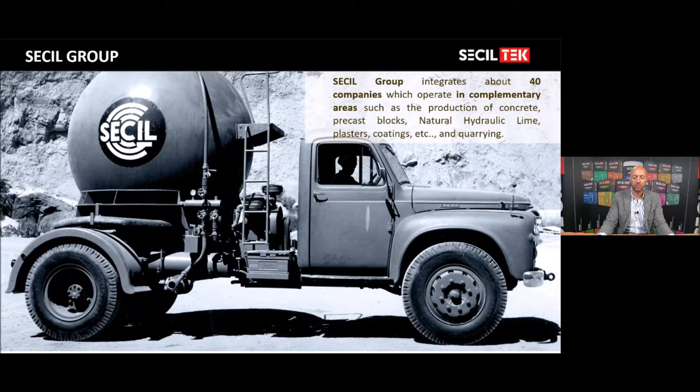Just a quick presentation about SECIL and SECIL Group. SECIL is a leading group in Portugal, founded in 1930, which integrates about 40 companies that operate in complementary areas such as concrete, precast blocks, natural hydraulic lime, plasters, coatings, quarrying, and of course the production of cement.

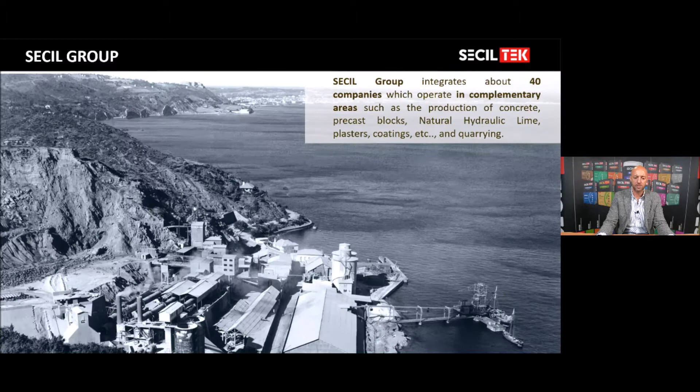The company originated in Portugal and now extends to other countries, mainly Tunisia, Lebanon, Brazil, and Angola, with activities in the cement business.

Regarding SECIL TEK, which is a company within SECIL Group, SECIL TEK is almost 130 years old with large experience in lime production. It was founded in 1891, called at the time Cimentos Naturais e Cal Cimento, and is one of the oldest hydraulic lime production units still operating in Europe.

Aside from lime production, we now also produce natural hydraulic lime, which we use for mortar production and also sell in the market as a premium binder for mortar production.

Starting now on the subject of natural insulations, I would start with a concept called Ecocork. This concept is based on several concerns, mainly the use of a premium binder, which is the natural hydraulic lime we produce, and also, as the name says Ecocork, the use of durable, recyclable materials, preferably from natural renewable sources - here we talk about cork.

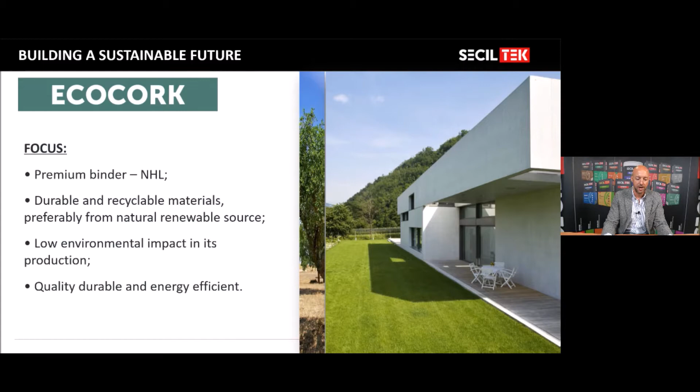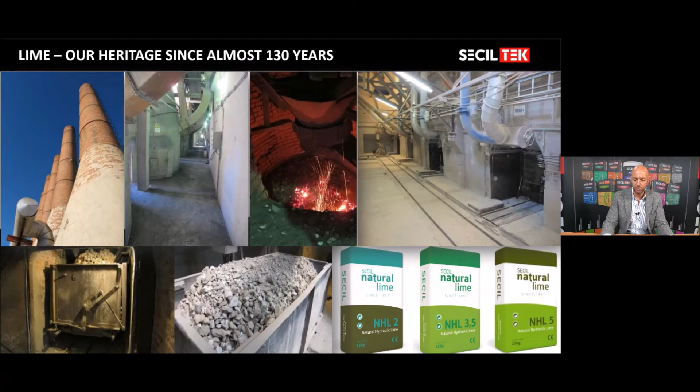The NHL and the cork together represent materials with low environmental impact in production, and also quality, durability, and energy efficiency. Considering the binder, the NHL, we have our production unit, our plant in the center of Portugal, where we produce NHL2, NHL 3.5, and NHL5 that work as binders for our mortar production, but also for supplying construction sites for mortar production in several countries.

These are the main advantages of using NHL compared with other binders. Its pureness - according to the standard and our production, it doesn't allow any additions, so it's 100% natural with a high free lime content. It's characterized by CO2 absorption through carbonation, and also low emissions, so it's almost like a full cycle in terms of emission and capture of CO2 when it sets.

Also, the gradual development of mechanical resistance is very important in mortars because we want them to gain resistance at longer term with slower increase, to prevent pathologies like cracks and micro cracks in the mortars themselves.

The natural hydraulic lime is also characterized by its hydraulic and aerial set, so it's a binder that gains resistance through these two types of setting, and it's a binder in mortars with total chemical and physical compatibility with ancient mortars.

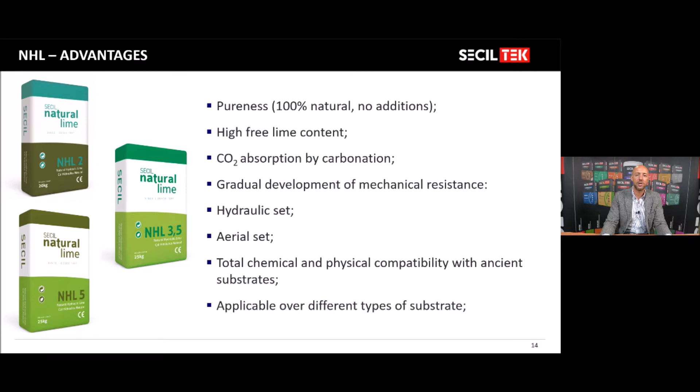It can also be applied over several types of substrates with excellent water vapor permeability performance, without calcium sulphates, and with very good resistance to salts.

Here we talk about durability of the mortars. So when we talk about mortars with NHL, we are talking about resistance to salt in environments with rising damp, capillarity, hygroscopic salts, but also freeze-thaw cycles, which is very important in northern countries. It's also characterized by its natural color, with excellent workability when used in mortars, and it's recyclable.

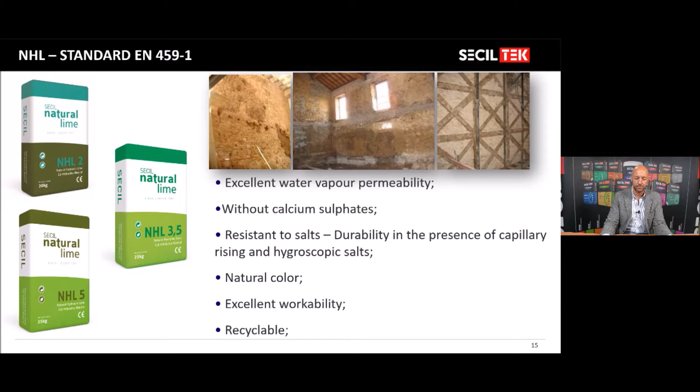Now we get to the aggregates, and here the concept is even more interesting because we take the cork literally from the trees without damaging or killing them, so we are even improving their durability, and we take it from the skin of the trees to use it on the skin of the buildings.

So this is a concept of sustainable construction where we look for the minor environmental impact possible and the lower power consumption possible. So as I said, we are using natural durable raw material with the aim to reduce energy consumption through the improvement of thermal insulation of the buildings.

This way we are improving the quality of the internal environment, including acoustic and health benefits. So here we focus mainly on the comfort of the people living or working inside the buildings, and the health benefits in terms of internal air quality.

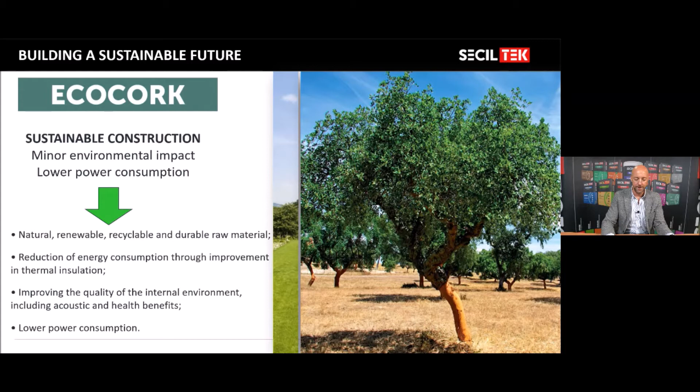When we talk about industrial mortars, and Ecocork is an industrial mortar, we cannot forget that using these aggregates, which is a 100% natural lightweight aggregate, we are focusing on the thermal performance of the buildings, the acoustic performance - mainly aerial sounds and reverberation - and also the durability. Three key factors that play a big role when developing a new building or looking at refurbishment or rehabilitation.

This represents costs and a long-term view in terms of what we have to do in maintaining the building. So when we look at mortars and products that have high durability, high resistance to freeze-thaw cycles, temperature amplitudes, and presence of salts, we are looking at high durability and low necessity for rehabilitation or maintenance.

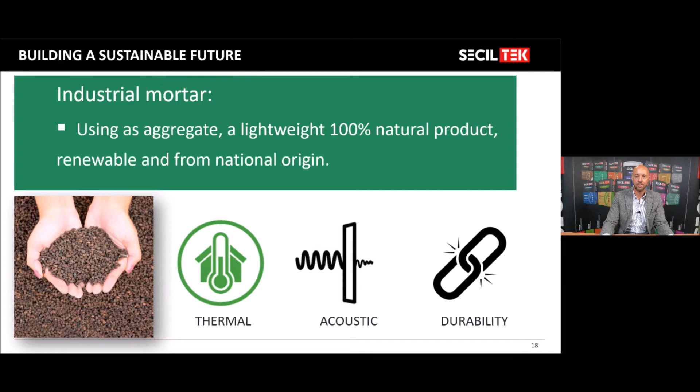Of course, in terms of building a sustainable future and looking at the Ecocork systems and mortars, we really have to focus on the environmental concern that motivated us to investigate and develop these mortars.

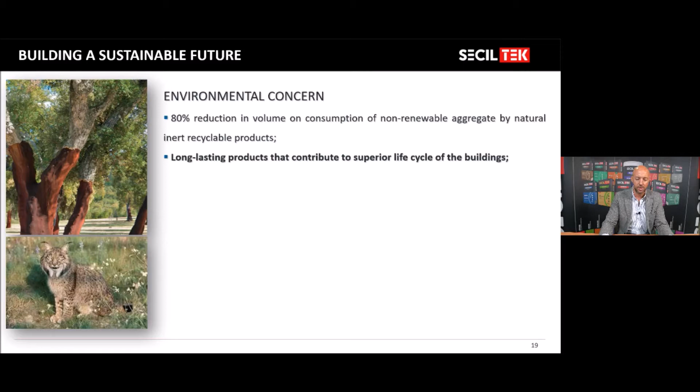So when we are using a lightweight, renewable, 100% natural aggregate, we are reducing roughly 80% of the volume in consumption of non-renewable aggregates. And we are using long-lasting products that contribute to an increased life cycle of the buildings themselves.

An increased concern also is the analysis of different products that, put together, make systems, and when applied envelop a building - or even when we're talking about interior insulation. So we need to focus more on the life cycle analysis of products as a system, and then the building itself. This is an issue that more companies, developers, and architects are focusing on now.

Of course, the technical concern has to go hand in hand with the environmental concern. So what does that mean? Improving the thermal performance of the building, improving the dynamic behavior of the solutions applied. We want solutions that have good energy storage capacity and thermal delay - thermal delay is one of the points I'd like to focus on more when talking about insulation mortars with cork, and cork insulation itself.

Because cork has an increased mass, you can compare lambdas, thermal conductivity, thermal resistance, but there is a factor that plays a big role, which is thermal delay. Usually insulation materials with lower mass don't have very good thermal delay. So the time it takes for a temperature to get from point A to B, crossing an insulation, is quicker than with an insulation that has higher mass. This is also an important thing to focus on.

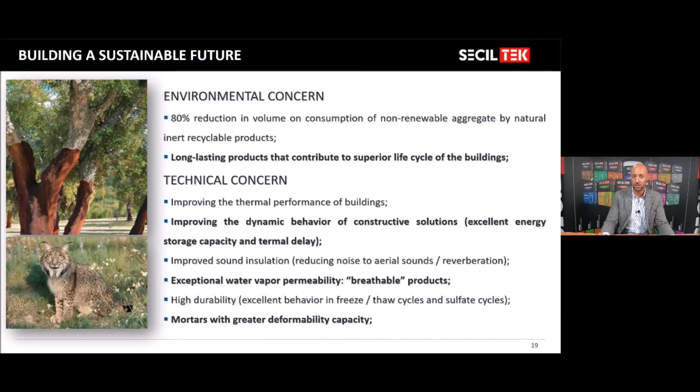Now, specifically about the products - we talked about the concept, and now we go to the products, to their application, and to the advantages. We are now looking at the buildup, and let's imagine a buildup with a stone masonry wall, a refurbishment, a rehabilitation. So we are looking at several steps in order to rehabilitate or renovate this facade.

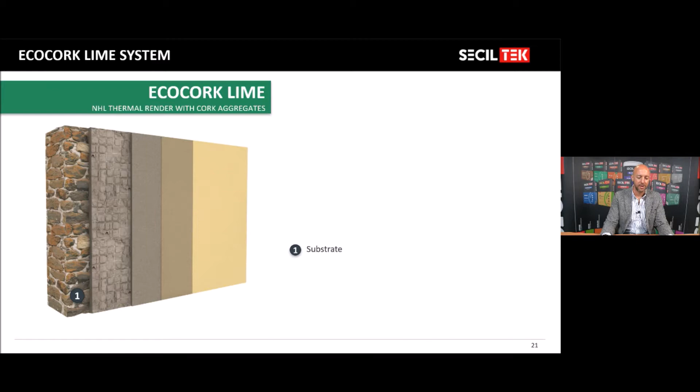First, we have to look at the substrate. We have to look at what is there. We have to make it a solid substrate to receive the solutions.

Sometimes we have to do some kind of consolidation. For that, we suggest a consolidation mortar based on NHL that sometimes has to be reinforced with a fiberglass mesh in order to consolidate and reinforce the substrate.

After this consolidation process, we now have the layer that will serve as thermal and acoustic insulation. Here we use the Ecocork Lime, which is an NHL-based thermal mortar with cork aggregates, which can be applied at around 40 mil up to 60 mil thickness tops, of course in several layers, hand applied or even sprayed with a spraying machine.

In terms of finishing, we have different types of finishes, but the most usual is the Reabilita Cal AC, which is a plaster. It's a fine plaster, around 3 mil application total, with a fine sanded finishing, very nice fine sanded finish, which is applied usually in 2 layers with a fiberglass mesh with 160 grams per square meter.

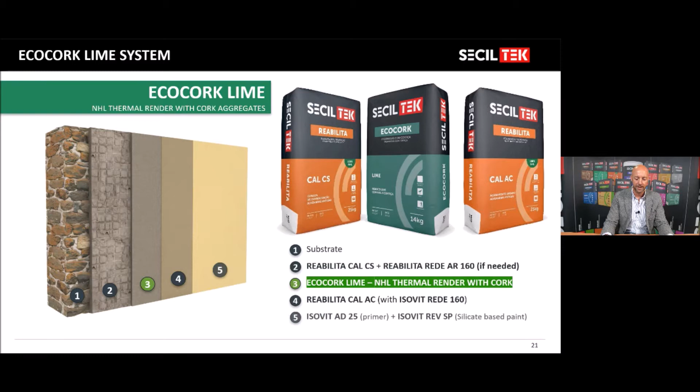This would be completed with a silicate-based paint scheme. It's a 100% silicate-based paint, characterized by its high breathability, high vapor permeability, and high durability.

As an alternative, because it's very, very usual, we may have the use of the Reabilita Cal AC in color. So we also supply it in a specific color that afterward would have to be protected with a water repellent agent with also high breathability, so as not to have a negative impact on the solution itself.

So this is the basic solution that we promote for the Ecocork Lime. Of course, there can be variations depending if you are working internally or externally, but for that I would suggest you consult our technical services.

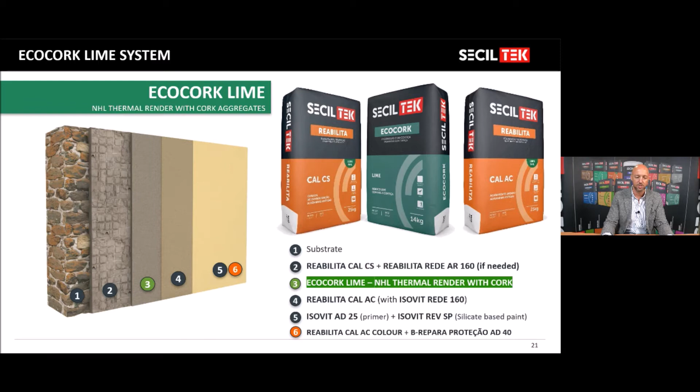In terms of the Ecocork Lime, as I told you, this is a lightweight mortar. It represents a lower consumption mortar with high thermal capability and acoustic insulation. It's made exclusively with natural hydraulic lime, and because it uses cork as an aggregate, it has improved sound insulation that can go up to 7 decibels in terms of noise reduction to air sounds.

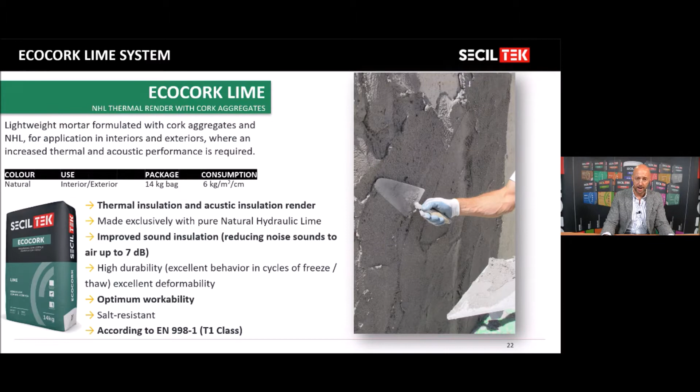High durability, optimum workability, the possibility of being sprayed or hand applied, and with very good salt resistance capability. This is supplied in 14 kilo bags. It's quite light, and the consumption is roughly 6 kilos per square meter per centimeter. This mortar is certified according to the standard EN 998-1, and it's a T1 class thermal mortar for thermal insulation.

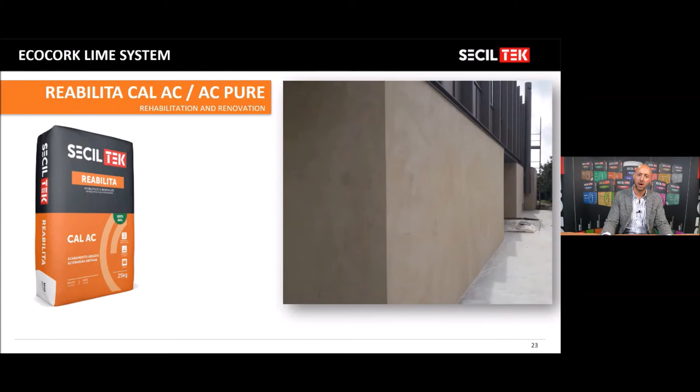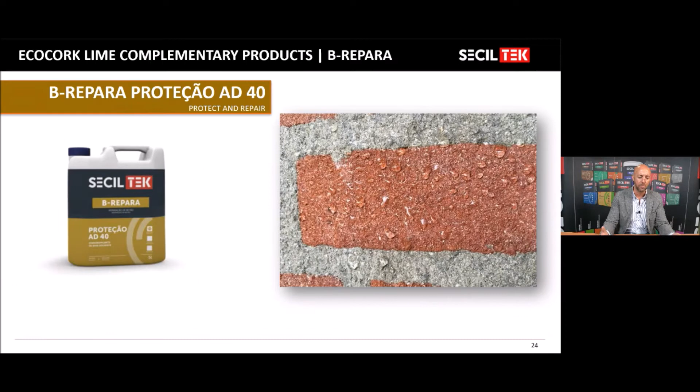Now we go on to the external wall insulation systems, ETICS, and I would start with an explanation according to the definitions of ETICS. I start here because this is an open webinar, so we may be speaking to people in Europe, in North America, in Japan, in several countries, in Spain, in France. So there are several definitions for what is an ETICS. An ETICS is a definition that is used by the European Union and EOTA for the certification of the systems.

But for example, if we go to England or the United Kingdom, it's mainly referred to as external wall insulation or internal wall insulation. If we go to France, they have a definition by isolation thermique par l'extérieur. And if you go to Spain, you call it SATE, Sistema de Aislamiento Térmico por el Exterior. If you go to North America and the United States, it's EIFS, Exterior Insulation and Finishing System.

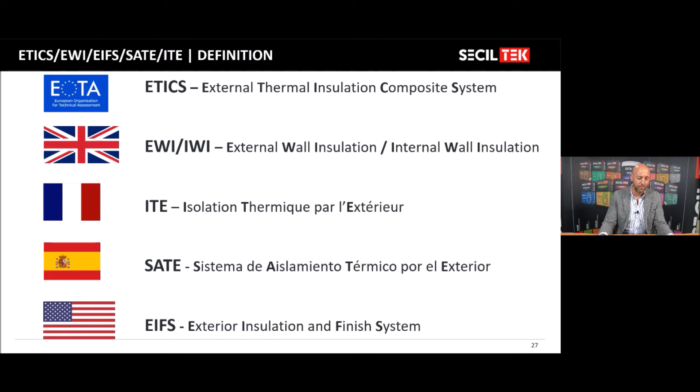But it's all the same. The definitions are different, but we are talking about the same system. So we are going to call it ETICS across this presentation - external thermal insulation composite systems.

The concerns that we have regarding the application of these systems, I think this is the main point we want to focus on. There's the external application, which is what the system was originally developed for, but we have several countries where, because of the type of architecture and buildings, the only way possible to increase performance and improve internal comfort is to do internal insulation. There are downsides and good sides of these two approaches, but sometimes you have to try to live with it. Of course, the internal application usually represents a loss of internal area - everyone knows that you are increasing by 40 mil, 50 mil, or whatever.

In terms of thermal inertia, you will usually have less thermal inertia. Sometimes if you are renovating a building, you also have to do something on the external facade. This is, of course, a good way to do it. The key factor is how to choose the insulations, mortars or systems. In external application, it maintains the internal area and protects the building in a better way. We are protecting the structure, improving the thermal inertia, and renovating the facade.

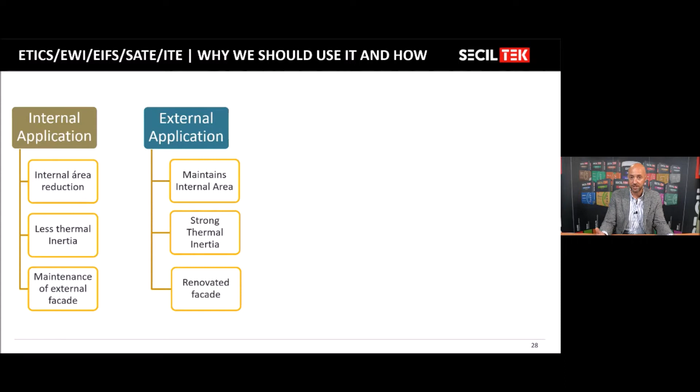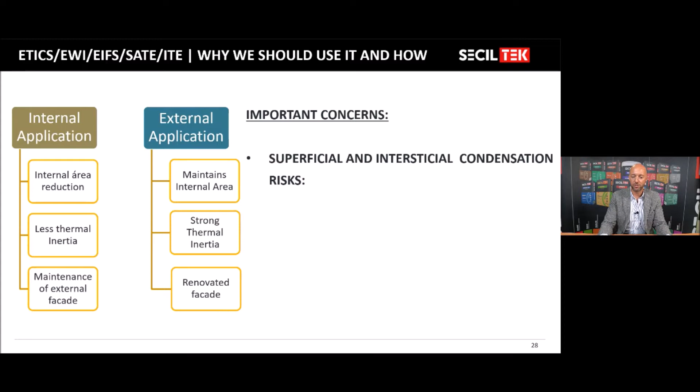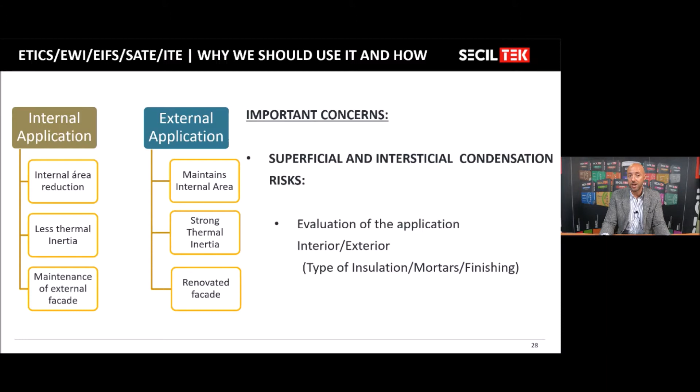In terms of the concerns for both applications, the first would be superficial and interstitial condensation risks. We need to evaluate if the application is interior or exterior, and the type of insulation, mortars and finishes being used. For example, if we're going for internal insulation, depending on the insulation's breathability and behavior, depending on the region, we may have the risk of interstitial condensation. This can create a problem in terms of internal air quality and other pathologies.

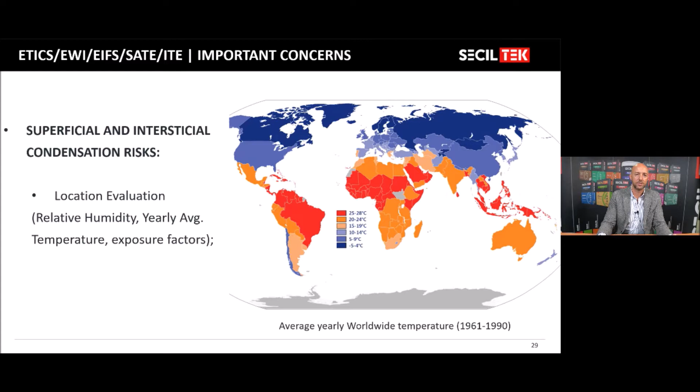The other concern would be location evaluation. We have to evaluate, depending on where we are, relative humidity, the yearly average temperature of the area, and exposure factors - if it's northern facades, if it's close by the sea. All those things play a factor in terms of the system and solutions you are using. Ideally, the more breathable the system is the better, and the lower water absorption the system has the better. For that, we have to consider the building itself.

We have to consider the probability of having rising damp issues. Most buildings, even new ones, unfortunately don't consider a horizontal barrier to prevent moisture from going up by capillarity. When we have rising damp issues, we will have problems in the interior and exterior. So we have to create ventilation. If it's possible to create ventilation in the exterior, that's good, but sometimes there is no possibility, and we have to use breathable systems for rendering, facades, or interior insulation that promote the evaporation of this damp.

We also have external factors like wind and rain. This creates an issue in terms of the system used, because if the system is highly absorbent in terms of water, this has a negative impact. We may also have condensation in the interior, because increased pressure on a building, depending on its use, creates more internal pressure. If you have something sealing the internal wall or the external facade, you will have condensation issues, and then pathologies like black mold and other things.

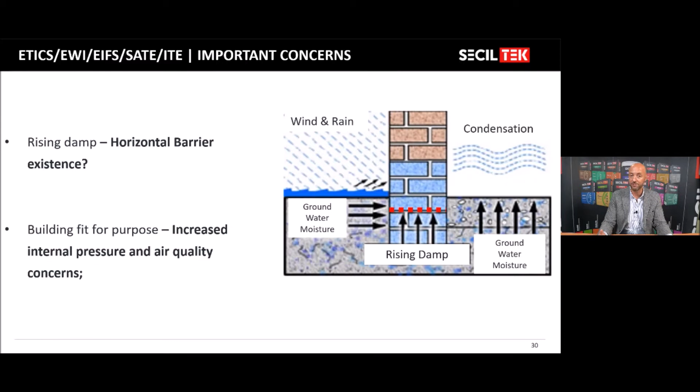So we have to think about the building itself, the fit for purpose - what will be the purpose of the building? If it's going to be for living, for working, an office building, if it's going to be well ventilated. Even if it is a private house, the ventilation of the houses is a key factor to prevent many pathologies. It's not only the system itself, the insulation systems that have to play the role - the ventilation needs to exist.

Also, another thing I would focus on is the water absorption of the mortars and insulation materials. We can see that the more water absorption our systems have, the lower R value they have, or the higher lambda value they will have - they will be more conductive. This means that if you think about a system with a good lambda, a good insulation value, but that system has high water absorption, the lambda, the conductivity, may vary a lot, around 40 to 50%, which represents a huge increase in conductivity and a high decrease in thermal resistance. So this has to play a big factor.

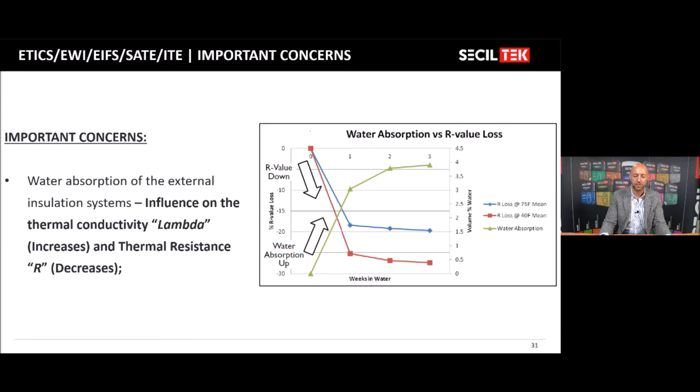We know for a fact that, for example, cork, in terms of lambda or conductivity, increases around 4 or 5%, but there are other insulation materials that, because of their high absorption, can increase up to 50% in terms of conductivity. So this has to play a big role.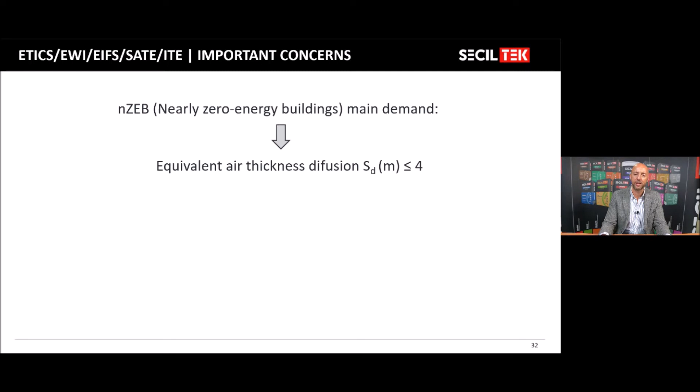And the last but not least, we are talking about vapor permeability. I take the example of near zero energy buildings, where one of the demands is that for insulation, the equivalent air thickness diffusion should be below 4. We are talking about the Sd value, which measures how much resistance to moisture diffusion the material or barrier has compared to a meter of air.

This unit is measured in meters, and I'll show you a quick comparison with expanded polystyrene, extruded polystyrene, and expanded cork. EPS, by definition, has some breathability. XPS is closed pore, usually used to apply ETICS systems on buried walls because of its closed pore structure.

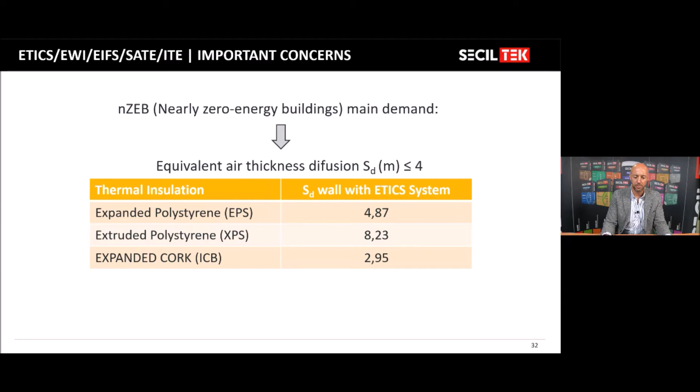But because of its low capillarity and breathability, the Sd value is very high. The expanded cork, you can see, is around 2.95. Cork is considered a low absorbing material but highly breathable material, so this is also a very important aspect.

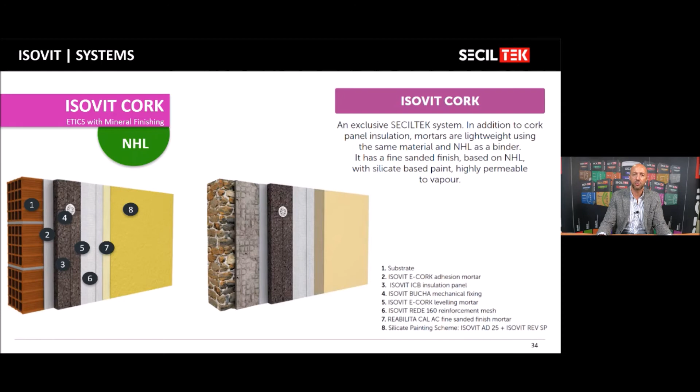In terms of systems and buildups, very quickly, the Isovit cork system, which is the ETICS system using cork board, NHL mortars, and silicate-based paints, is now certified through technical assessments for substrates like blocks, ceramic blocks, concrete, and we have a specific ETA for wood substrates as well.

This is a very important issue, something traditional in several countries: the use of timber frame with OSB or cross-laminated timber buildings. It was very important for us to have a specific solution and system that could be a perfect match between this wooden construction and the solution itself.

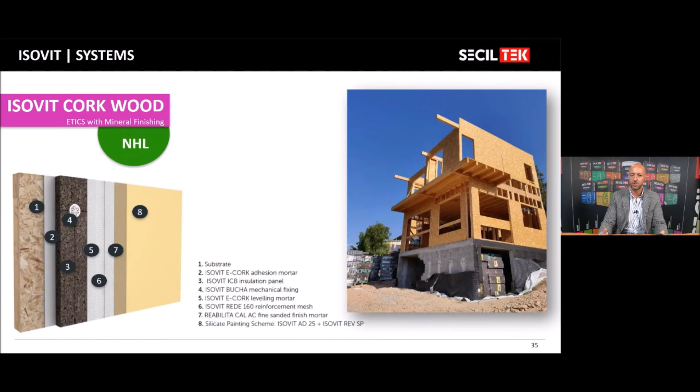In terms of application, for fixing and leveling the boards, we use a mortar with NHL and grinded cork in the interior. It's also a lightweight mortar with low consumption and high yield on the job site, very easy to apply.

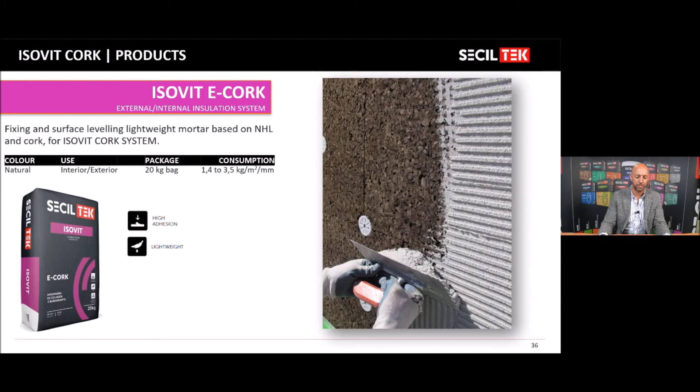For the finishing, similar to the Ecocork lime system, we use Reabilita Cal AC, which can be natural color or colored, or we can use AC Pure. AC Pure is a similar finishing NHL product with a fine sanded look, but it has photocatalytic properties giving it self-cleaning and air purification properties.

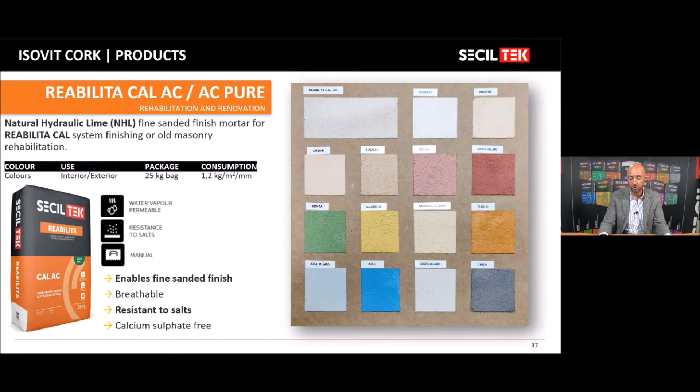With AC Pure, there's no need for water repellent agents, but if you use Reabilita Cal AC in color, you should use a water repellent product. The AD40, which we supply, is a polysiloxane-based product with high breathability and very good protection against water absorption.

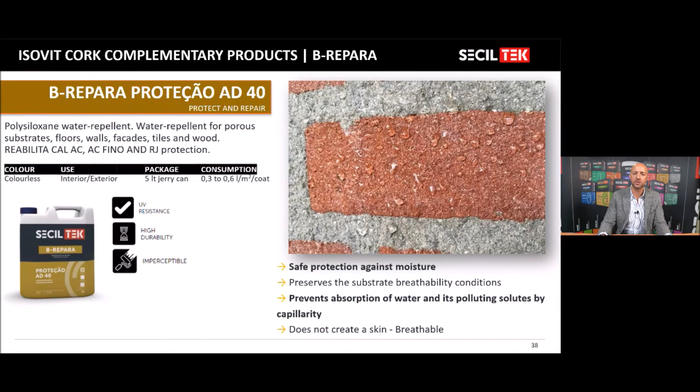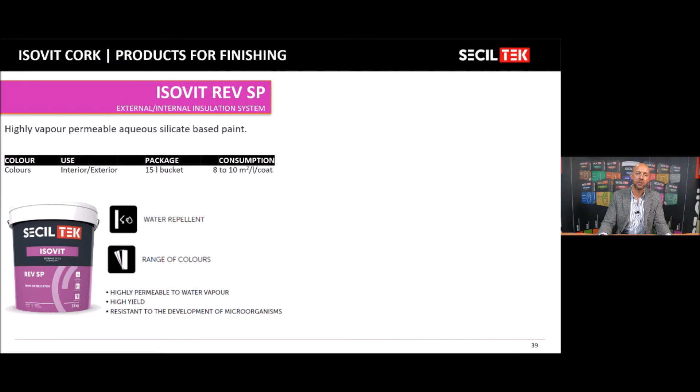If you're using the lime-based finish in natural color and want a paint to improve durability, we have Isovit Rev SP, a 100% silicate-based paint. Or for a finish with some grain size, we have Rev SL, which uses silicate as a binder and has a grain size between 1.2 to 1.5 millimeters, coming in paste form.

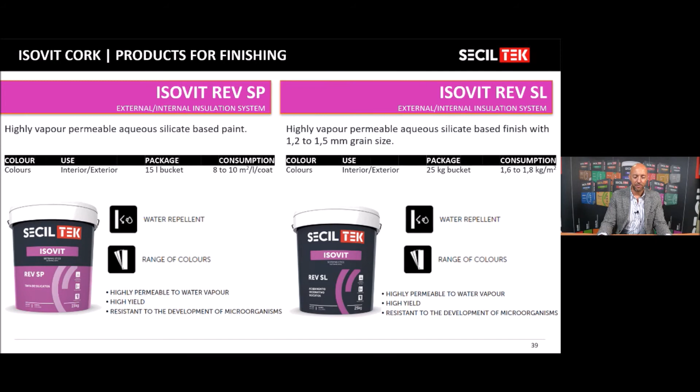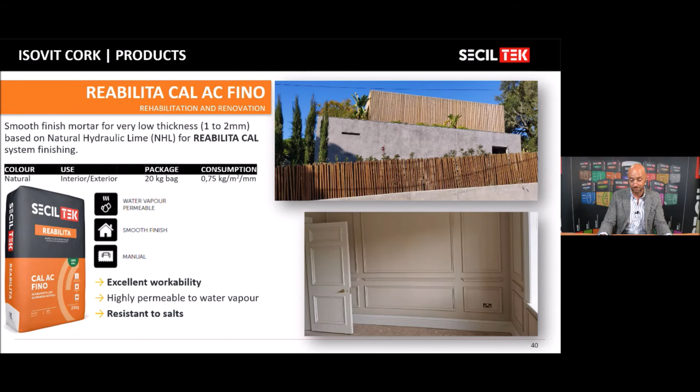For some of you this is nothing new, but the step-by-step application of an ETICS system, considering your substrate is level and cohesive, involves applying the boards with adhesion mortar on the back, spreading the mortar completely across the board.

Sometimes if substrates are uneven—considered uneven at more than 1 centimeter deviation with a 2-meter ruler—you can apply the board glued by points, then apply it directly onto the substrate correctly, like laying bricks or blocks. You must make sure the joints don't align, to avoid creating durability problems and higher tension areas for cracks and micro cracks.

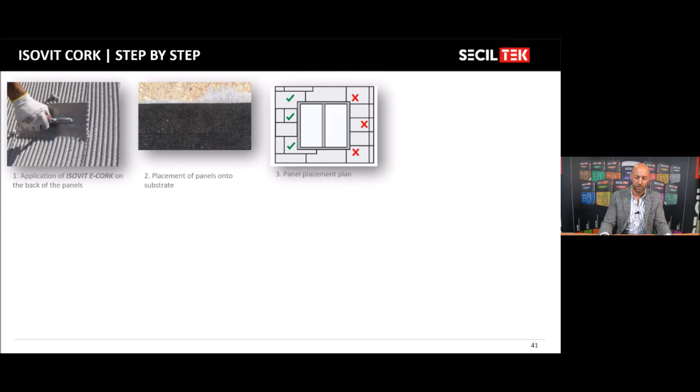After the mechanical fixing process, depending on whether it's a concrete, block, or wood substrate, you'd use different types of fixings. You have to reinforce all special areas, mainly doors, windows, corners, dripping profiles, or window sill elements, to prevent cracks on the finishing layer.

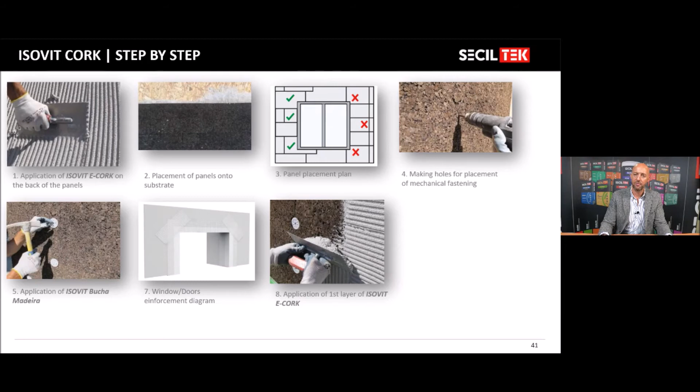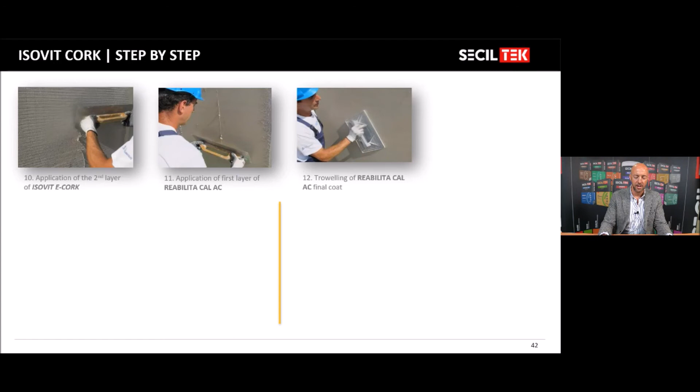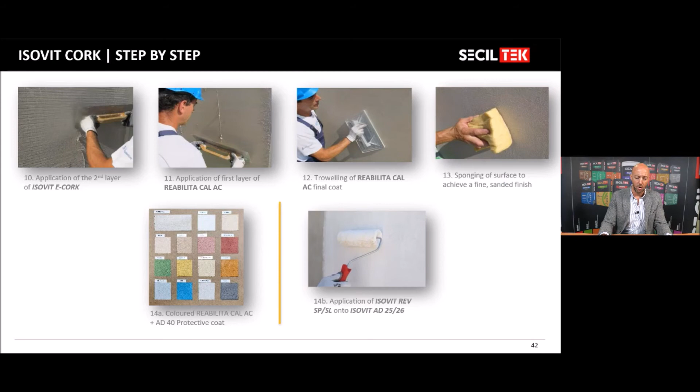Then you apply the first layer of Isovit E-Cork, introduce the fiberglass mesh, a second layer for leveling, and then the Reabilita Cal AC finish or AC Fino finish. This gives it the fine sanded look, which can be used already colored or then painted with a silicate-based paint or paste, as I've shown earlier.

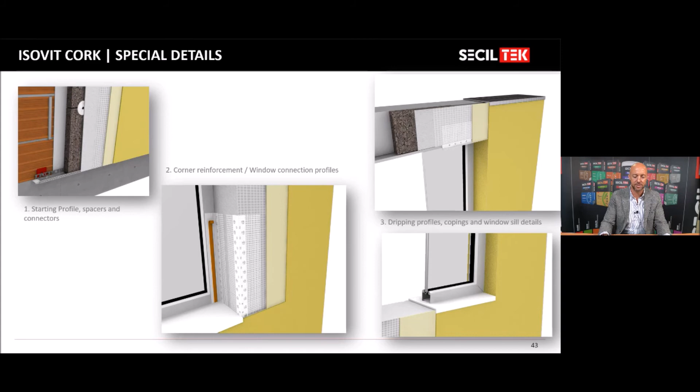Don't forget that the problems we find on these systems are mainly due to the poor treatment of special details. So we have to look at the starting profiles, the spacers and connections between starting profiles, window connection profiles, corners and dripping profiles, window sills, and copings in roofs. All of this is to prevent water from getting in between the connection of two different elements, from the top of the system, and from migrating from below. We have to keep this in mind during the prescription of these systems.

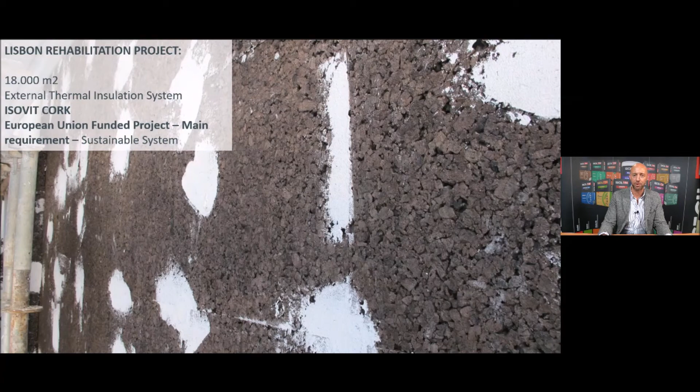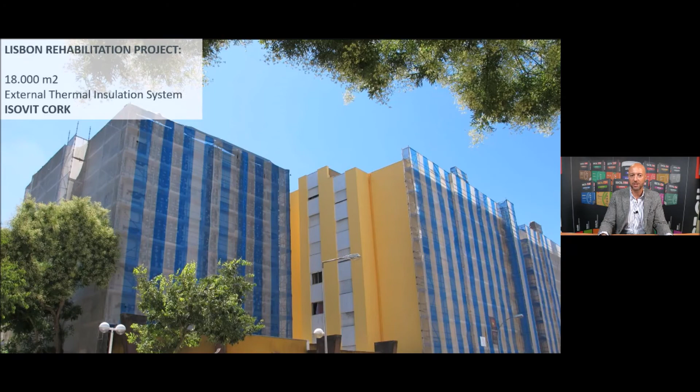In terms of references, I can show you some from Portugal. External wall insulation—this is an example of 18,000 square meters we did in a social neighborhood. This was a European Union funded project that required a sustainable solution, and it really increased the living conditions of the people there, who had a lot of problems with thermal insulation, but also with acoustic insulation.

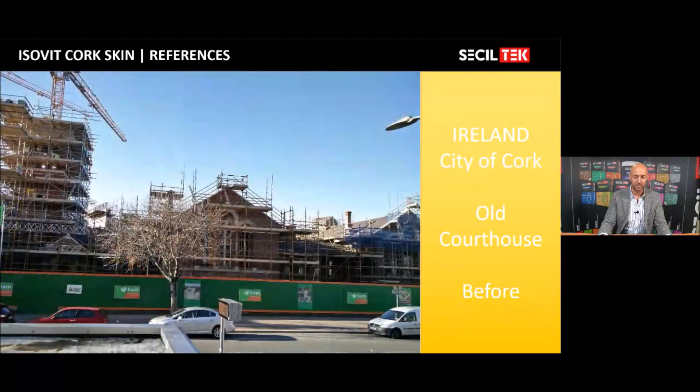I can also show you another project in Ireland, where we did the rehabilitation of the interior of an ancient courthouse transformed into a school. This was roughly 2,000 square meters, and we had to do some repointing and repair before application of the system, and execution of some samples for approval by the construction company.

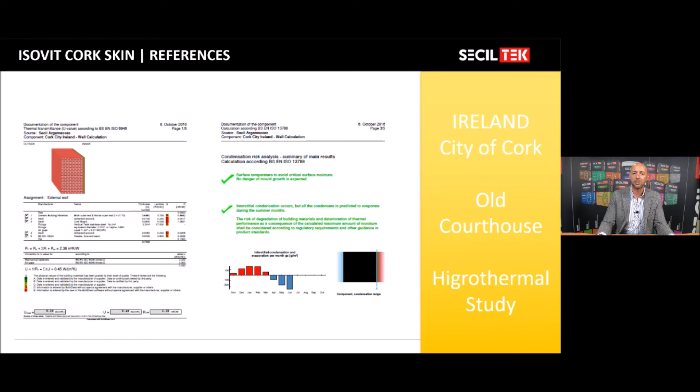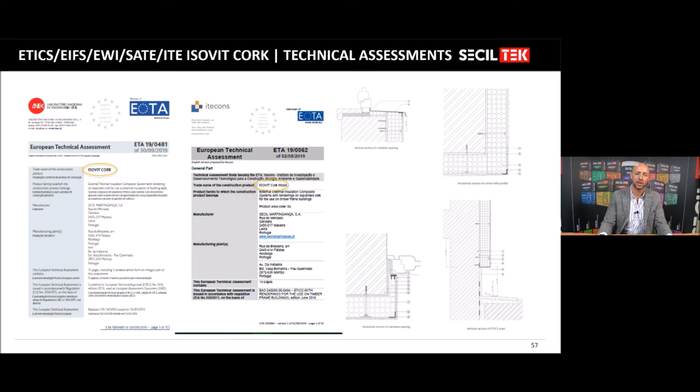When I say support, I mean not only from the manufacturers but technical support. We have European technical assessments for the Isovit Cork system, and also for the Isovit Cork Wood system, for wood substrates, together with some details we supply for correct application of the systems. Specifically in the UK, we also have LABC certifications for external application and internal application of the system itself.

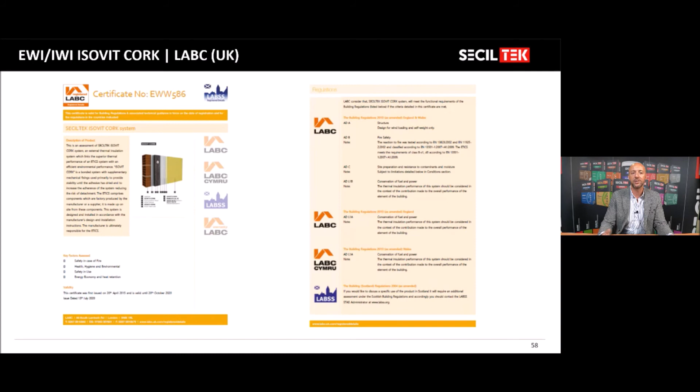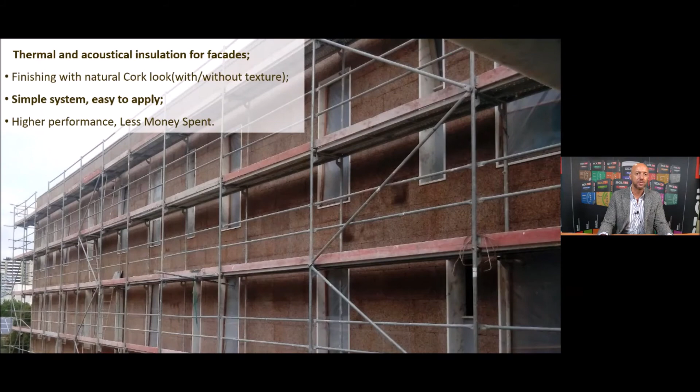Now I would like to show you a variation of the system, the Isovit Cork Skin. As the name says, it uses a high-density cork board to work as a cladding and finishing system. This is an interesting approach, where we also tested the performance together with a mortar we developed based on NHL and cork, but with higher resistance to water and higher adhesion.

The boards applied to the Isovit Cork Skin system—the high density boards—are only fixed with the mortar by double bonding. So we have to make sure that any water migrating through the joints of the high density cork board arrives at the mortar and doesn't migrate to the substrate.

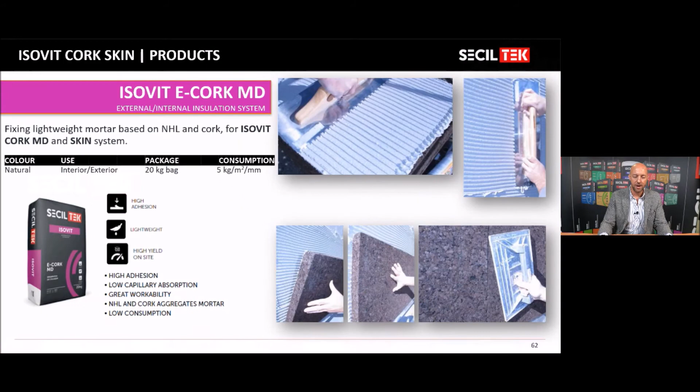For that reason, we developed several tests with wall buildups, measuring resistance to rainwater, pulsating rainwater, and air pressure. We found that there wasn't any migration of water, and no problems with high pressure in terms of detachment of the system. So this is something we are very comfortable with.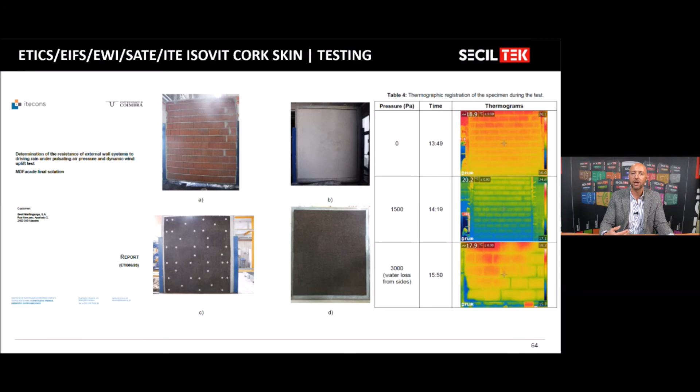This follows some rules, mainly disconnecting all joints between the first layer of standard cork and the second layer. For this system, we also have interesting references from Italy, with different architectural approaches that worked very well, also in Portugal, Spain, in containers or wood houses, or in connection with other materials like concrete. So we can have different approaches to these sustainable, natural systems, which go hand in hand with traditional ways of building as well as new ways of building.